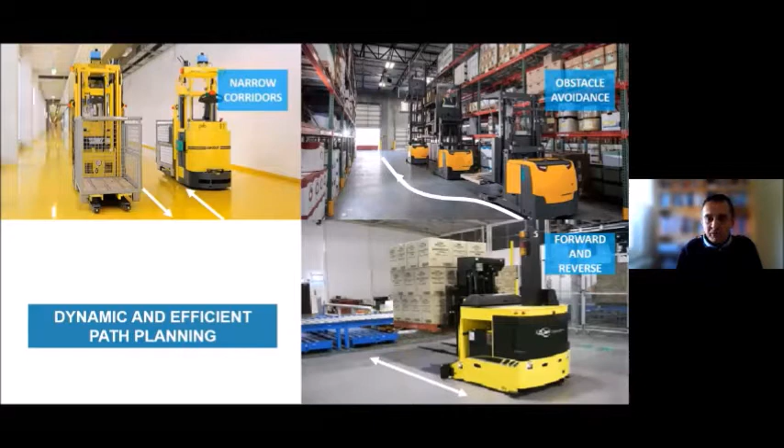In the first half of the webinar, we will address a very common need for autonomous vehicles, namely how to plan the motion. And this is typical for all autonomous vehicles because they have to drive to a destination, and the trajectory towards the destination has to be planned. But typically the environment is very dynamic, for sure in industrial environments, and these trajectories have to be adapted in real time to the conditions in the field.

And in the examples on the slide, you can see an AGV that has to pass another AGV in a narrow corridor. It has to avoid obstacles, and it has to drive forward and reverse.

So as I have already anticipated, we have two presentations. This topic will be covered in the next presentation, which is on optimal motion generation, which will be presented by Joris Gillis from Flanders Make, together with Jeroen Bridelance and Bram Vanseveren from Bekaert. And now I would like to give the word to my colleague Joris Gillis.

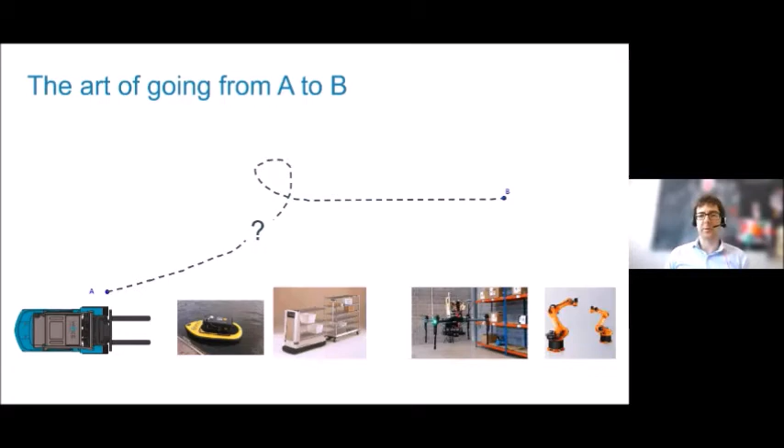So what kind of vehicles are we talking about? It could be forklifts or boats, or maybe a more complex model with a trailer. It could also be quadcopters, like 3D space. It could also be joint space of serial robots. So in general, some space of going from A to B, but let's now just visualize this screen as a top-down view of a warehouse with a forklift.

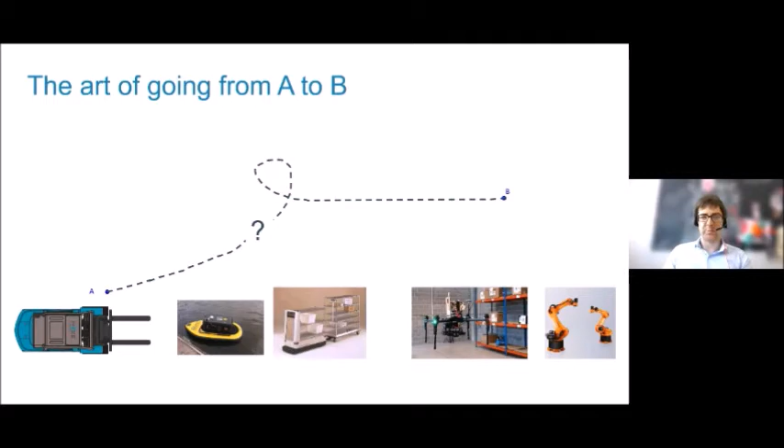So when you hit the obstacle, you could say, okay, I just go sideways for a couple of meters. And when I'm done going sideways, I go towards the goal point B again. And you could repeat this rule, and in the end, hopefully you end up at place B. So a very ad hoc rule-based way to go from A to B.

What are more structured ways? There are two big optimization-based approaches. And the first is discrete based. So you have this wide open region between A and B, and you just sample it randomly or uniformly. And all the valid locations that are not inside the obstacles, you can connect in a graph.

And then you basically apply the graph search algorithms that you find in your GPS or on Google Maps, and you just find the shortest path between A and B on the edges of this graph. So that's discrete based. Now the things I will discuss are continuous optimization based.

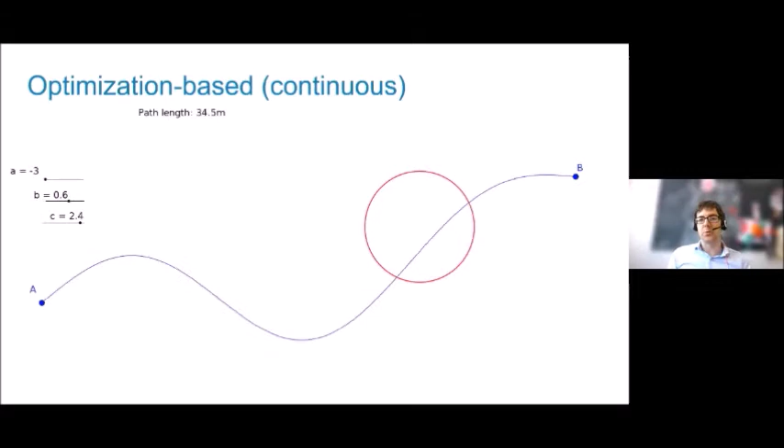So we can do this mathematically. We say our path length is really a function of A, B, and C. And then you could write, okay, let's minimize this path length. And the degrees of freedom are, as I said, A, B, and C. The only thing you have to take care of is the obstacle, so make sure that the distance between the path and the obstacle is positive.

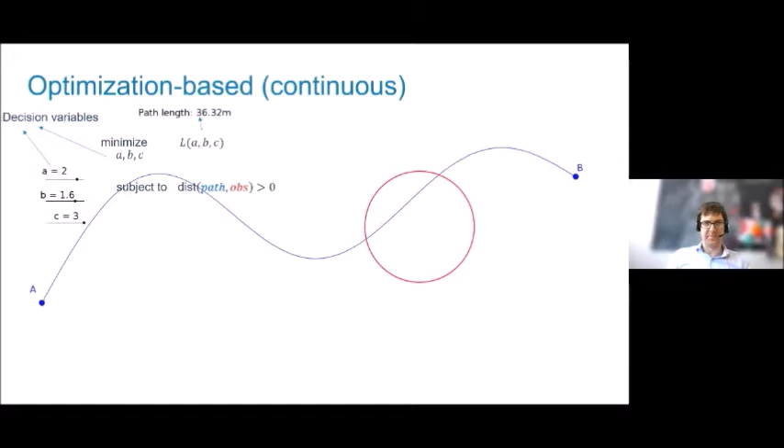And for a human, it's already quite difficult to do this with 3 sliders. But as we will see, for software, it's no problem. So we will use a technique called gradient-based optimization to solve this problem. And later on, I will go to software on a higher level. So what can gradient-based optimization do in this case? You give it an initial guess, which would be just a straight line from A to B. And then with just a couple of minor adjustments, you get to the exact optimal solution.

So this is the initial guess. This is the first iteration. So that's a numerical process thinking that the intermediate solution is this one. You do a second iteration, third, fourth, and with the fifth, you already get something very optimal. So it's almost straight for a while and then edges over to the obstacle. So this is quite nice that a numerical software can find this in only 5 steps.

And the power to do it is really in the ability to take derivatives or sensitivities of your objective, your goal, with respect to these parameters. In the packages at Flanders Make, we use a software called CasADi to do this. So this computes the derivatives that are needed for efficient solving. So in this case, the number of optimization variables was only 3, but it could also be 10 or 100 or 10,000. And typically the iteration number stays rather small. It doesn't grow unbounded.

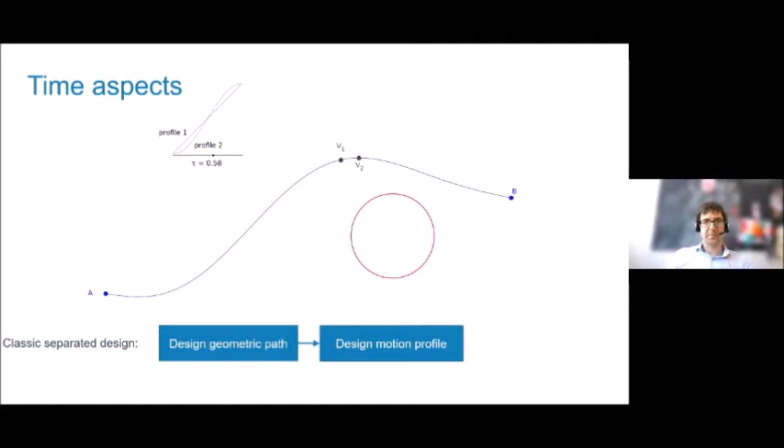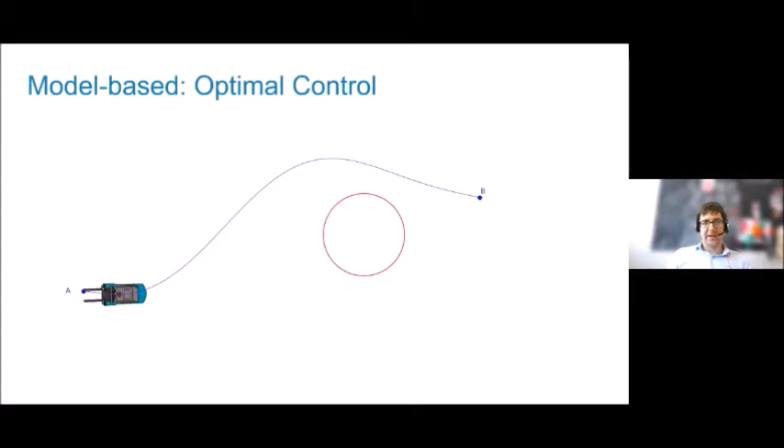Another aspect is that you can bring in the mechanics of the model of the vehicle you're using. I'll demonstrate this with another software tool that we built on top of the previous one.

In this case, we're going to set up an optimal control environment with a free running time. So we don't know in advance how long it will take to go from A to B. We keep it free and optimize for it, so we find the shortest time path.

Then we model the system with states and controls. Our forklift has 3 states: 2 for position, the X and Y position, and then also a heading. These are the states of our system. The controls, the degrees of freedom we can play with, are the speed of the vehicle and the steering angle.

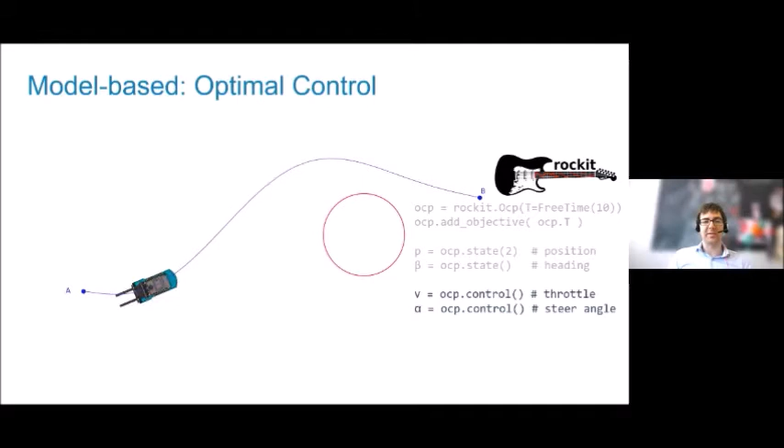If you do things right, when you solve the optimal control problem, it will find the steering trajectory and speed trajectory that you have to apply on the system. You can apply this in real time and it will follow this trajectory.

The model needs to be good enough, so we need some kind of prediction model. We typically do it with a differential equation. It could come out of MATLAB Simscape, for example. We can set as many boundary conditions as we want.

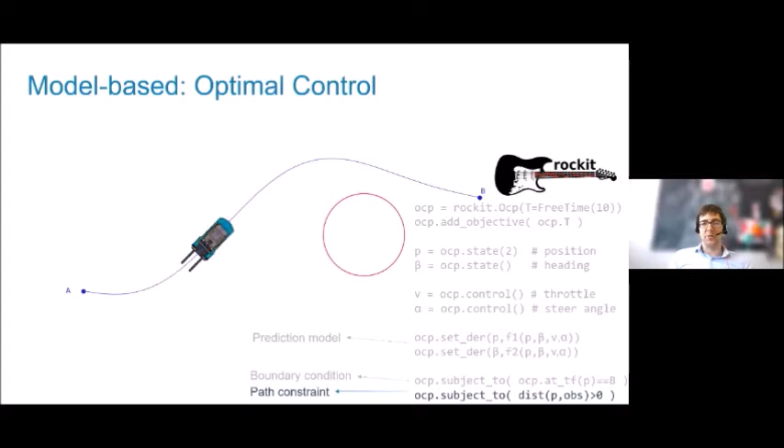In this case, we want to end up at B. There are also things that should hold during the whole trajectory, and that is, in this case, the obstacle constraint. This gives you a high-level way to specify optimal control problems, which are used to find optimal motion trajectories and the controls needed to implement those trajectories.

When I talk about optimization, historically not everybody has been doing this in the most efficient way. What you typically see when people are first using optimization is that they use unconstrained optimization and put everything into one objective. Let me demonstrate how this makes things difficult.

For our problem, we could say, okay, I want to minimize the time, so go as fast as possible. But there might be some path that we want to stay close to, so we don't use all the free space, we want to stay reasonably close to a prescribed path. You could do this by adding a term in the objective and giving it a weight, W1.

Then another engineer comes in and says, okay, we have to be careful with power, our battery is only limited, so we add power to the objective. And then there are the obstacles, and somebody invents a way to represent that you have to keep a distance from the obstacle, giving it another weight. In the end, you end up with a real tuning nightmare. You have all these different weights, and depending on your system and context, you will have to retune and retune these weights. It's not a nice situation to be in.

What you should really do is exploit the fact that you can have constraints in the optimization problem. So instead of promoting staying close to the reference, just say how close you want to stay: I want to stay within 1 meter, or 1 centimeter, or 1 millimeter, and let the solver figure out the rest. For the battery, maybe you say the battery has to stay alive during one shift of your factory workers, and it doesn't matter if there's more or less battery power left after that shift. Also, you just have to make sure you're a safe distance away from the obstacles.

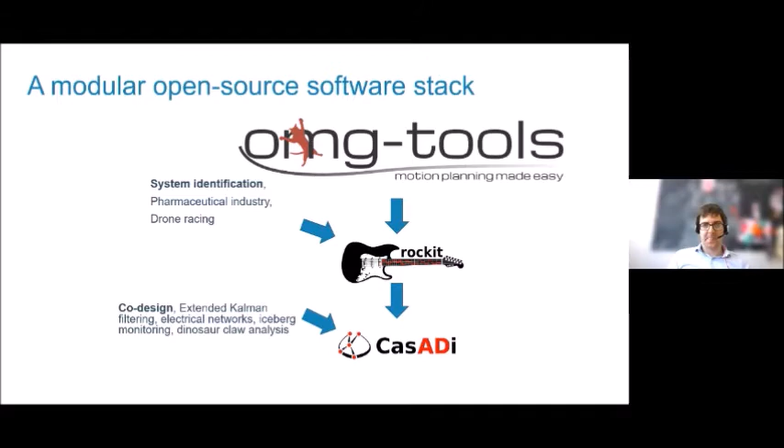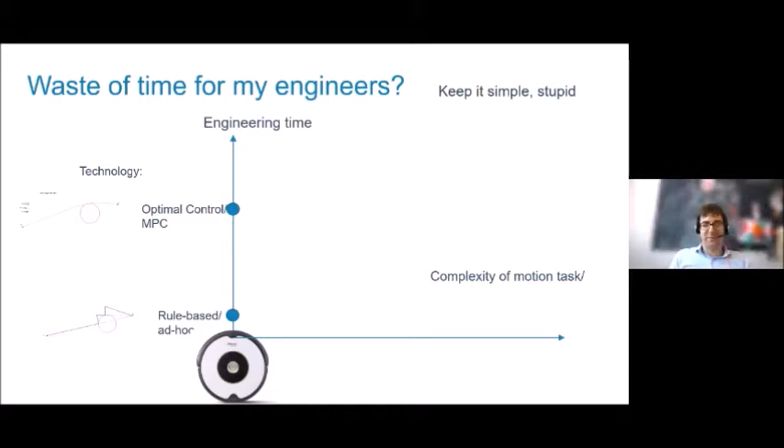So why am I telling you all of this? Perhaps you are thinking at this point it might be a waste of time for my engineers. Let's see. Things that are developed ad hoc or rule-based typically don't need a lot of engineering time. So if I plotted this technology on the scale, you don't need a lot of time. If you go for optimal control or MPC with OMG tools or other tools, it will require a large investment in time from your engineers. But the thing is, this is only true when your systems or your tasks are very simple. So if you're a company designing cleaning robots, maybe all of this is overkill, and a random walk in the environment would be enough.

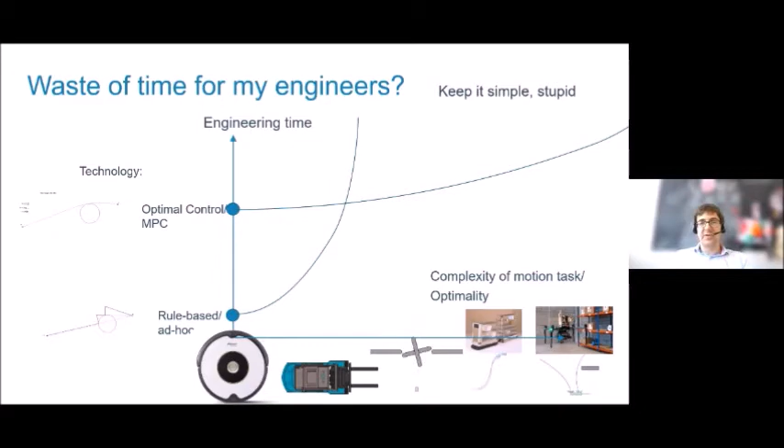The thing changes when you have an increase of complexity. Like a forklift is a bit more complex, or you might have things that evolve over time and you can use preview, or you can have a system with a trailer, or drones or robots. So on this bottom axis, you get more and more complexity, or more desire to have more optimality. And optimality would translate into throughput or economic advantage. So my argument is that if you stick with rule-based or ad hoc techniques, you would quickly go up and maybe hit a brick wall, while with optimal control, optimal motion generation, you start high but you stay low.

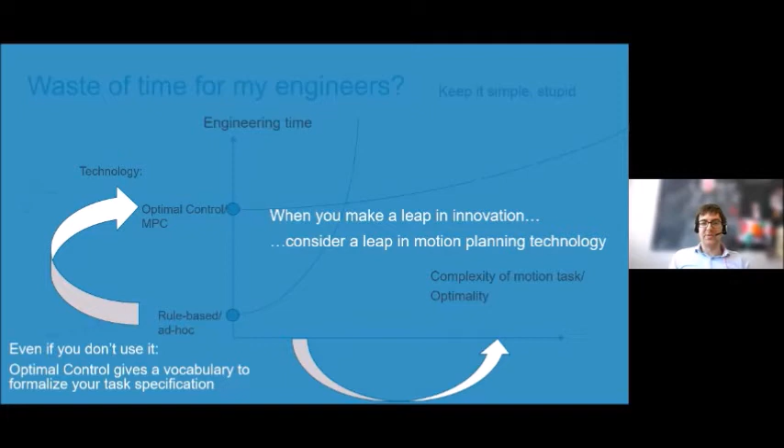The conclusion would be, if you plan to make a leap in innovation of your products, going from simple products or simple contexts to more complex ones, then perhaps you should also reconsider the technology you're currently using for making motion planning. Even if you don't want to bother your engineers with it, you can already use optimal control's vocabulary to formalize what a good motion task is, and it makes it very easy to communicate with engineers in other fields.

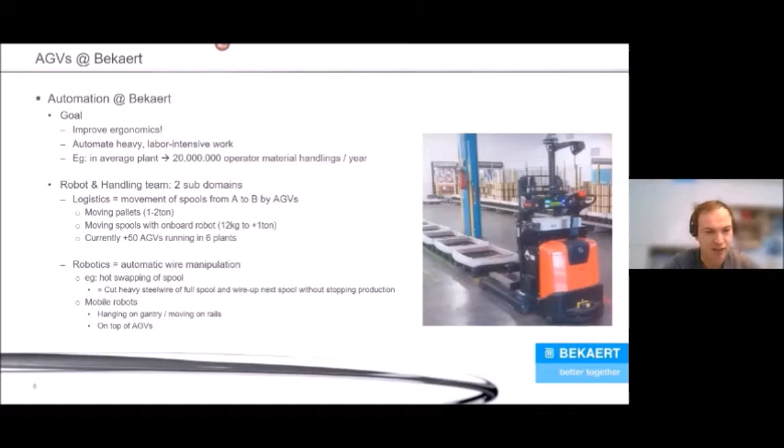For that, we started using mobile robots. First, we went for robots hanging on a gantry or moving on rails. But later on, because we have a lot of machines and a complex environment within the Bekaert plants, we started to build those mobile robots on top of AGVs. Because of this, we have a lot of AGVs, and this requires good navigation for them.

Looking at the navigation technology we use, this is the only part of the AGVs that we do not develop at this moment for Bekaert. We used off-the-shelf products, that being the NDC8 platform of Kollmorgen. It has some pros: it is highly reliable and well known to the industry.

But there are also negative points, being that AGVs need to drive on fixed segments, so you cannot move away from them. This means we can do no obstacle avoidance or collision avoidance when we started the project, and also no map refinement is possible. What I mean by that is if we know a spool is always 5 centimeters more to the left, there is no possibility to teach the system that with this setup.

Now I will give the word to my colleague who will talk about those two negative points about the system.

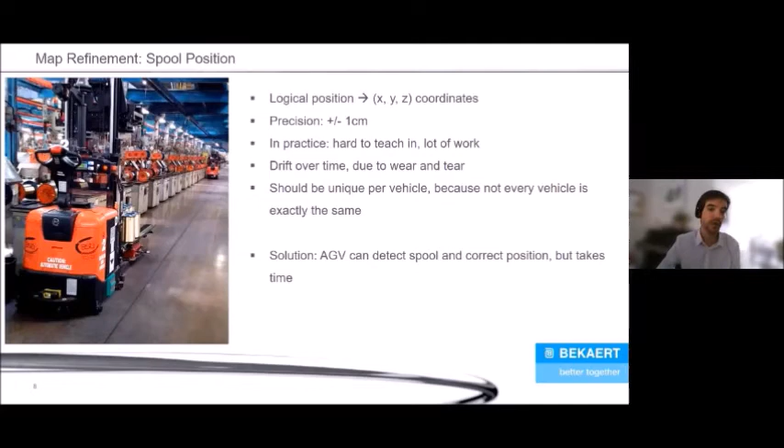The vehicle drives there, and the vehicle detects the spool at slightly different coordinates. Let's call them x2, y2, and z2. The vehicle, of course, picks the spool. Then a very important step, step 4: the vehicle sends back the offset. So it says I did a correction in x direction of 50 millimeters, in y direction of -5 millimeters, and in z direction I did a correction of 0 millimeters, for example.

This information is sent back to the host system, and in the host system we keep it in a database. So for every logical position, we keep the physical position per vehicle. If the vehicle sends back these offsets, we update that position.

What we do, we first detect outliers. If the vehicle sends a value back to us that is really, really different from all the previous values, it's probably a sensor glitch or an error in the vehicle software somewhere. So we discard these values. And then if we accept the value, if the value is okay, then we take a sliding window average from the last values. For example, the last 3 offsets that that vehicle sent back for that specific location, we take these averages and we update the position.

So next time the vehicle drives there, we will send these updated values to the vehicle. So the vehicle will, in normal circumstances, already be positioned correctly with these updated coordinates and will be able to pick the spool perfectly.

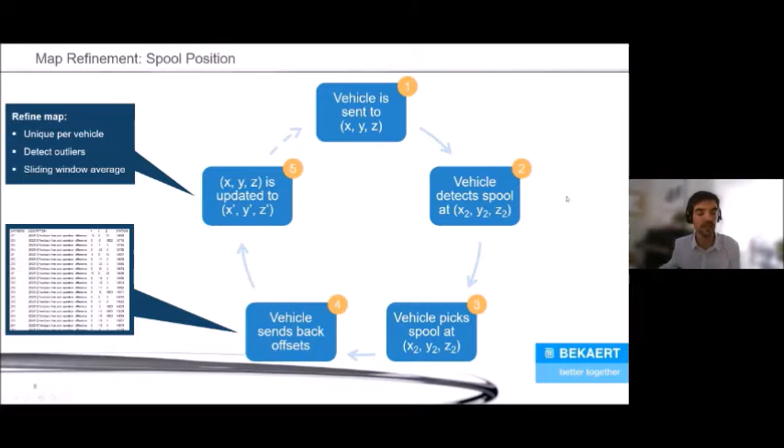So if a vehicle arrives, it has to pick a driving lane, the top one or the bottom one, and can only pick on that side. The vehicles also always drive in one direction, in this case from the left to the right. That's just for safety, because an operator then always knows where a vehicle can come from. And with these types of vehicles, they pick a lot of spools in one bay, up to 15 spools, and then they drive to a palletizing robot for unloading.

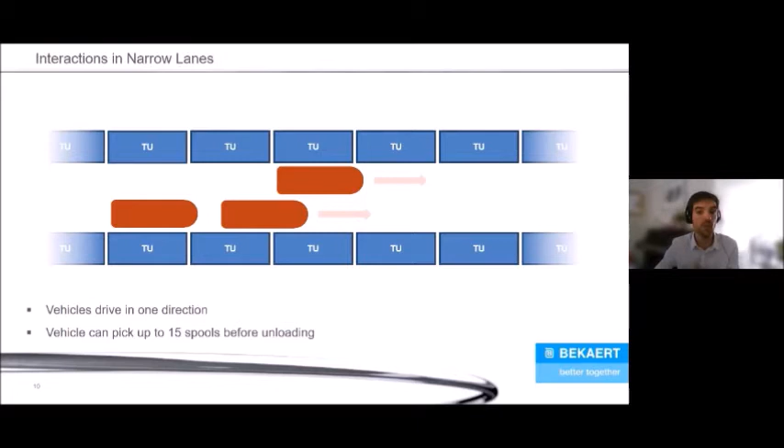The problem is, of course, that on the bottom, these 2 vehicles drive behind each other. If the first vehicle is slightly slower than the second one, it will be blocked a lot of the time because it cannot pass or overtake. Also, if an operator is working in that bay, the vehicle will also be stopped.

If you look at it realistically, we see that it is not efficient. Our vehicles, our current generation of vehicles, are quite long. The driving is very inflexible. So we decided with this type of vehicles not to drive around obstacles. It's a huge loss of time. For our next generation of vehicles, we're looking into way smaller vehicles that are more flexible, that have more steering wheels, because our current generation only has one steering wheel. When we have that new generation in place, then we will, of course, look into driving around obstacles again.

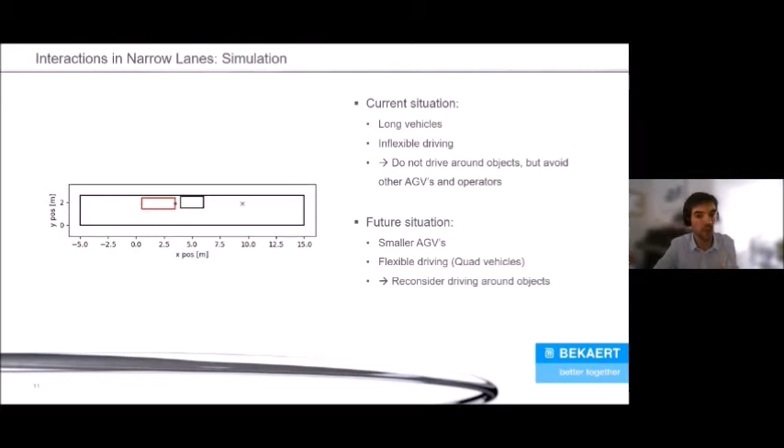So we could not solve our problem with this solution, it was clear. So we decided to go for a different route. We have a planning algorithm that decides which AGV will pick which spools. We decided to write a completely new planning algorithm from scratch with some extra requirements. The first requirement was that we wanted to make it very efficient. So an AGV would only drive through a bay and pick spools there when it could pick a lot of spools. A vehicle can pick up to 15 spools. So let's say we only let it drive to a bay when it can at least pick 12 spools. Or, of course, when it is urgent.

Every spool needs to be picked before a certain deadline, and that deadline is when the next spool in that machine is ready. So a spool is laying on the table. When the next spool is ready, the previous one, of course, cannot be on that table anymore. So a vehicle will only drive through a bay when it can pick a lot of spools, or when it becomes urgent. We call that just-in-time picking. And a second requirement is a vehicle should avoid bays where other vehicles are already present, because that would lead to annoying interactions. So we developed an algorithm with a scoring system.

So the algorithm has five parameters that influence the score, and each of these parameters has a certain weight. That defines how big that influence on the total score is. So if an AGV has nothing to do, he will calculate the score for every bay, and then he will decide what bay to drive to. If the score is too low, he will not drive to any bay. If the score is high enough, he will drive to the bay with the highest score.

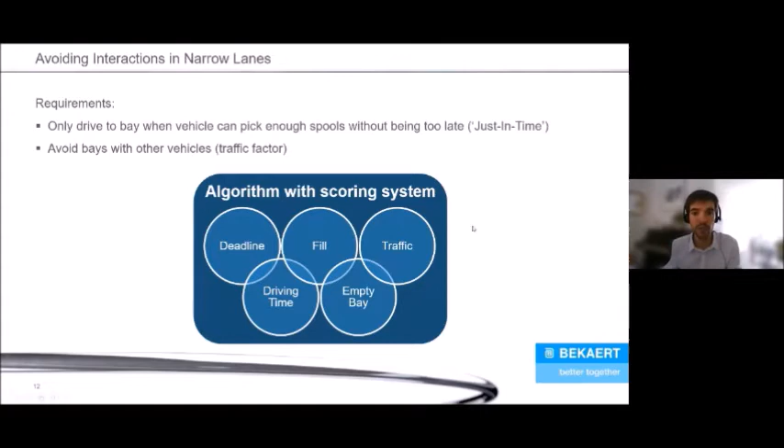We implemented this system. So in 2016, we had the old algorithm. In 2019, the new one with the scoring system. If you look at the block time, so the time an AGV is not able to do useful things when he is standing still for another AGV or an operator, it used to be more than 7%, and it dropped to less than 3%. That does not seem that extreme, but if you look at the number of spools, we pick 1,000 spools more. In 2016, we picked 2,600 spools, and now we pick 3,600. So a drop in blocking time and picking way more spools proves that the algorithm works and the results are quite good.

So interactions with other AGVs, that is solved. The only one that remains is interactions with operators. We had a very simple system for that. We installed at the beginning of the bay a push button and a colored light. If that light is green, it means an AGV can go and pick in that bay, and that no operator is doing a lot of work there.

If an operator needs to do maintenance to a machine or needs to weld something, then he pushes the button, the light becomes red, and that's an indication for the AGV that he cannot go in that bay and pick spools. When the operator is finished, he pushes the button again, the light becomes green again, and the AGV can take that bay again into account.

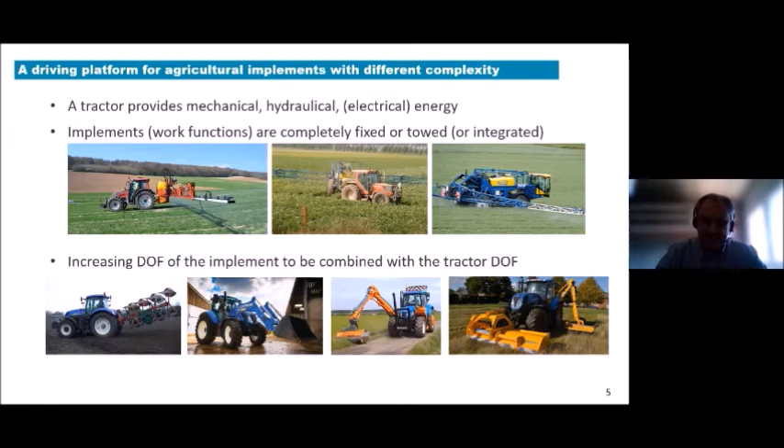For a mowing arm, you can lift it, but you can also stretch it further away from your vehicle, and you can tilt your mower, which are already 3 degrees of freedom. And if you're adding work functions and implements on the back side, but also on the front side of your tractor, you still have more degrees of freedom. So all of this functionality we want to be able to control.

And if we come back to the main building blocks, a first block there is the sensing. And you have sensing with different objectives. First, you have the sensing for your work function. In this case, we want to work with a front loader, which means we want to see the object we want to manipulate. In this case, this is implemented by 3 LiDAR sensors to detect a pallet.

So this LiDAR sensor works on an emitted laser pulse, which is reflected, and we can measure by that what is the distance. So we obtain a point cloud with distance and intensity towards objects in the neighborhood, including the pallet. And then in the processing that we do with those data, we have clustering of points, and we can detect the opening in the pallet that we need. This is still an expensive sensor, but as higher volumes of this type of sensor are coming in the automotive world, the price for this is rapidly decreasing.

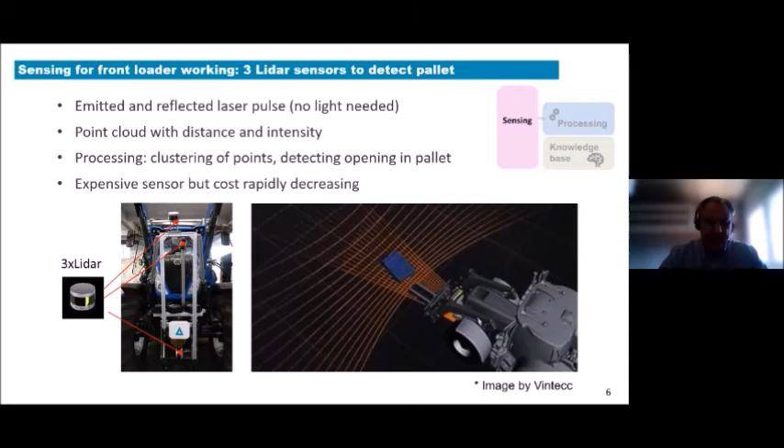A second sensing functionality we want to have is to detect obstacles. In this case, we have a radar and a camera combination that we use, for instance, to detect two persons walking beside the tractor in a field. The radar can give us the position and the velocity of those objects. The camera we use for classification, for instance, to say, oh, what you see there is a person.

And then for processing, in this case, we need quite high computational power by an NVIDIA Drive PX2, which is also typically technology used for autonomous driving. And we use that to recognize that the objects are persons. In this case, the knowledge base is a trained neural network. So it has been trained, for instance, for persons, which means that for mobile working, if we want to recognize other objects, for instance, the crop or stones or holes that could damage our implement, we will have to capture new data and we will have to retrain neural networks.

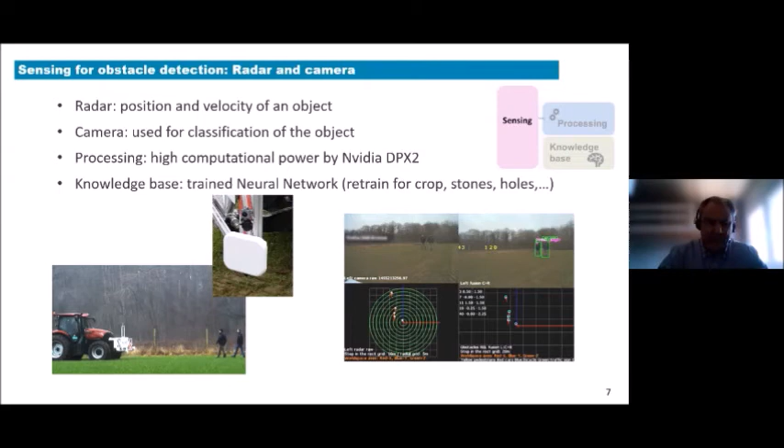And then the third functionality for sensing is to know where we are. And that we have realized on our tractor by implementing a standard GPS RTK system, which is basically using information from all global navigation satellites and using also fixed references. That gives us 2 centimeter accurate position of our tractor. And the knowledge base that we can use here is a map of the field, which we eventually have built up in a CAD system, or that we have been building up by historical information from driving over the field.

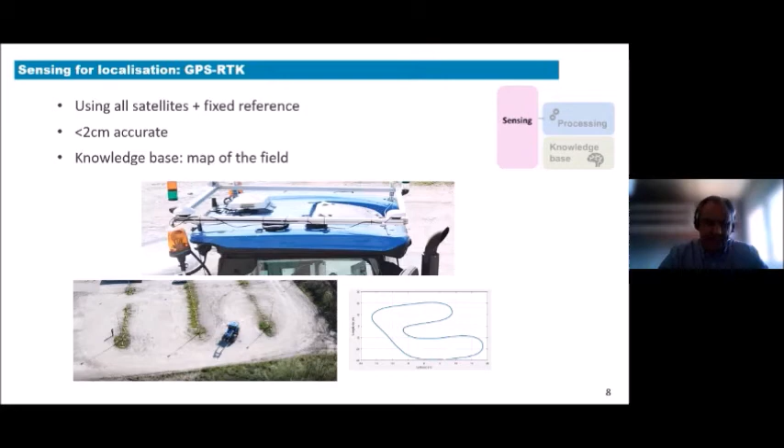Now that we have all the sensor information and by the initial processing have already turned that into valuable information, we can go to the next steps within the processing. On one side, that's high-level planning. For instance, first decide to go to a certain GPS position, which is bringing us a motion along a defined path with its own longitudinal and lateral control.

And then once we are close to the object we want to manipulate, go to a work motion planner, where we have both the motions of the tractor that we have to control, for instance, first aligning well versus the pallet, and then next operation where we, for instance, move the front loader and lift off the pallet.

During that task execution, we still have to keep in mind that if we see an object which is in the way, we either have to stop for the object or restart the planning and replan the whole path and follow a way around the obstacle.

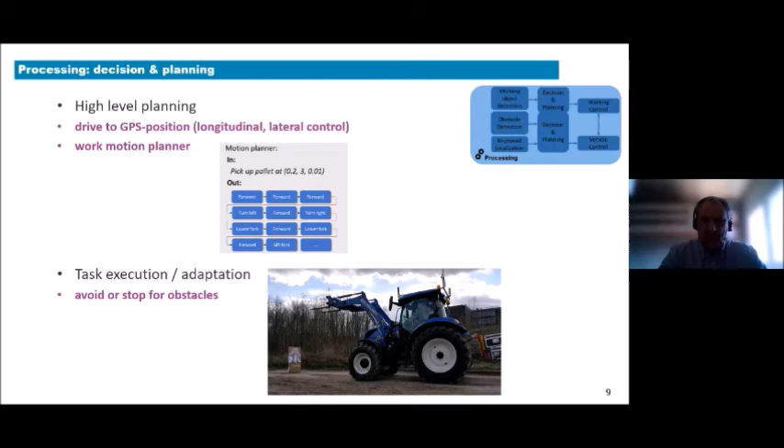Once we know how to control, we of course need to bring those signals to the actuators which are on the tractor. We have 2 different ways to do that. One is by sending the proper commands over the vehicle CAN network. On one side, for the working control, that's the lifting of the front loader, but also, for instance, starting the PTO so that we actually can bring mechanical energy into our work function.

But also sending the necessary commands for the vehicle control. That means the commands for the steering, for the throttle, for the gearing up or down. If we cannot do it over the vehicle CAN network, we also have a system which can be built upon the steering wheel, upon the available pedals, so that by mechanical activation of those operator interfaces, we can also bring commands to vehicles who do not have the type of electrical control.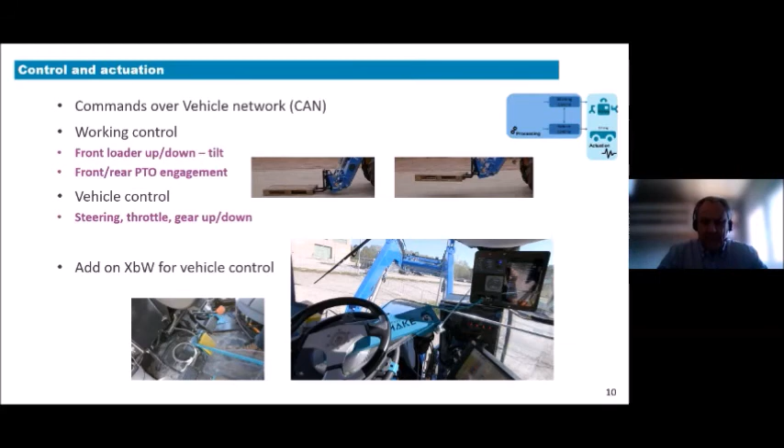And then the current situation is that purely for safety reasons, we do not want to have an unmanned cab. So we always have an operator in the cab who, instead of still operating the vehicle, is just monitoring how the different processes are running.

We have on board quite large data storage. As I explained, you at certain moments need a lot of data to be captured to be able to train some of the artificial intelligence systems on the information that are typically available in the working environment. We have a point-to-point communication for remote monitoring and control by other persons outside of the tractor cab.

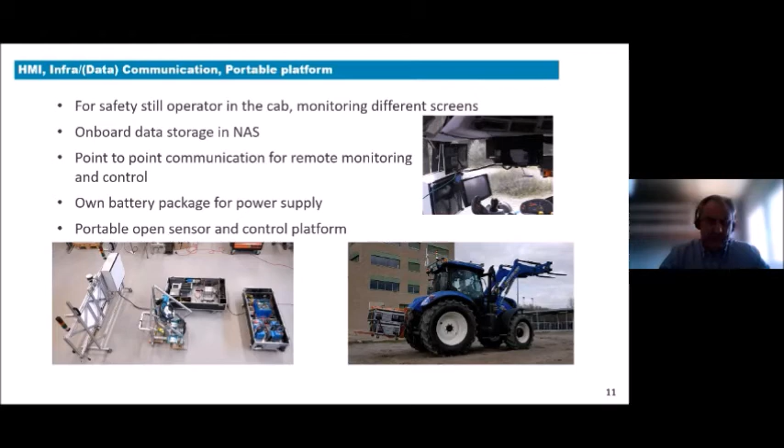We have an own battery system, which can provide the whole control system with power. And everything has been materialized in boxes and into portable systems so that we can put it on various vehicles. So this is an overall architecture. We have the sensing units, we have the perception pre-processing computer units.

And then we have on one side a rapid prototyping software for rapid manipulation of additional perception information. And we have a rapid control system, which allows control system engineers to very rapidly make controllers, for instance, in Simulink, and then make that into an operational program that we can download to the tractor. And there we also have a lot of interfaces, communication, I/O protocols that we on one side can use to add additional sensors, but also can use to control drives and other actuators on different vehicles.

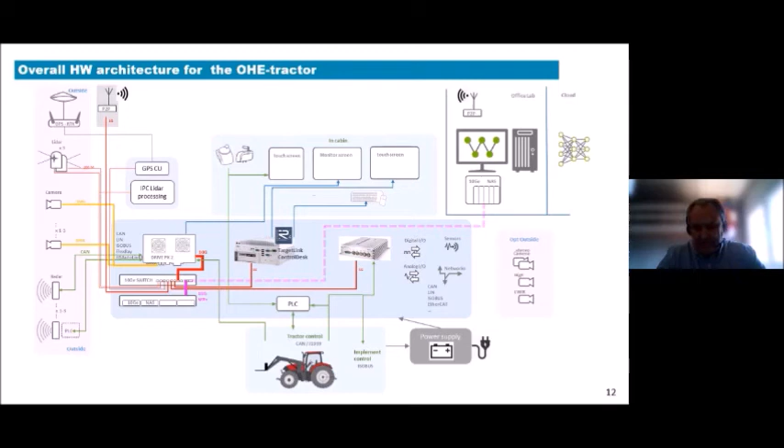With this realized mobile working platform and tractor, we want to support Flemish companies working on autonomous mobile vehicles, not only in the field of agriculture, but also on logistics, but as well construction works, mining and forestry. The front loader operation is typical for logistical and agriculture operations. We also want to further develop the use of artificial intelligence, for instance, better understanding what's happening around the vehicle, faster learning with less data, and also learning to execute more complex tasks in a very natural way.

And as we have the working and driving to work together, from an architectural point of view, it's not always clear yet how these have to work together. So the question is, how can you best build up your total system in a modular way on the levels of sensing and perception, on the levels of motion control, but also at the level of safety.

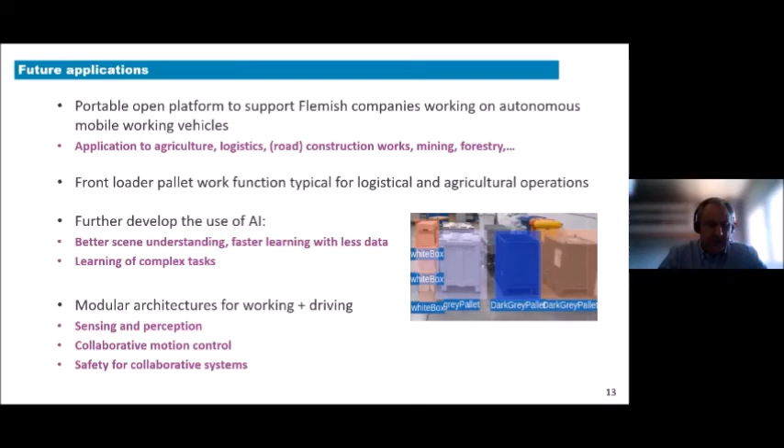And I now want to give the word to Bart Lenaerts from CNH, who can give you a view from the industrial side.

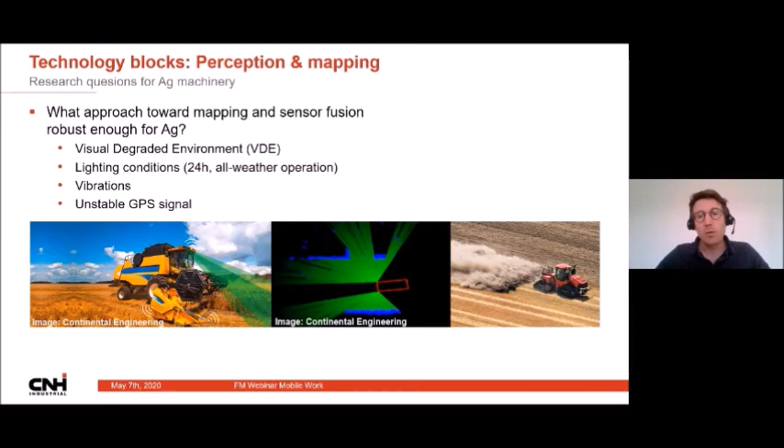Which are sometimes challenging for certain sensors, and we sometimes have an unstable GPS signal. Still, we want to be able to create a clear point cloud and a clear map that we can use for navigation. So therefore, we envision a sensor fusion of sensors of different principles to a map that then can be used for robust navigation.

Secondly, we have a question towards functional safety. How can we make our system certifiably safe if we take it to production after this project? Two main questions there are: how can we set up an appropriate engineering framework, or adapt our existing engineering framework, for designing future functional safety and operational integrity for autonomous vehicles? And what are the implications of the functional safety standards on our electronic architecture and component selection?

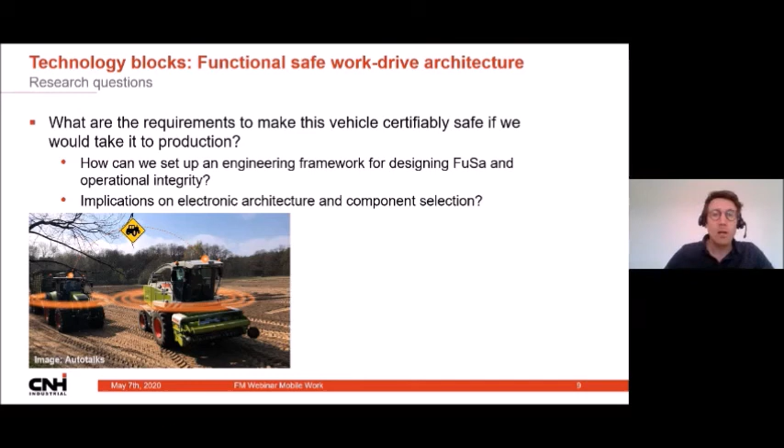Then a last technology block is on the simulation of agricultural vehicles and their environment. As you know, in the automotive space, Waymo, Tesla, and so on are driving millions of miles in a virtual environment and training their neural networks and controllers that way. But these tool sets are not easily adaptable for an agricultural environment. The question now is how can we select and adapt this tool set so it can be useful for our case. There are three core uses for these kinds of simulation tool sets.

The first one is the development of perception and obstacle detection. There are not so many sensing models for crop existing today. So how is the interaction of waves of sensors, for instance microwaves, laser light waves and infrared waves? How are they with the complex geometries of crop and complex properties, for instance in the microwave domain? How can we make a photorealistic rendering of this environment for neural network training for camera data? That's certainly not easy in the case of crop.

Then a second goal of these toolsets is accelerated development and testing of controllers. We have to make sure that this toolset can interface with our existing vehicle dynamics models and with soil and crop engagement models like the one you see below. It's a discrete element model for a tillage operation.

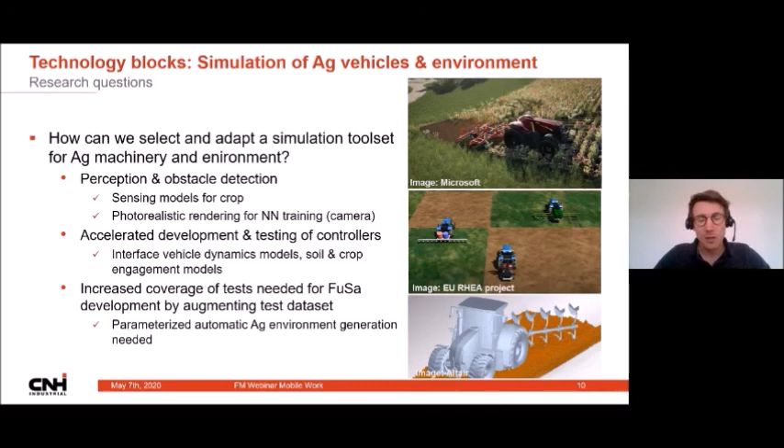What will the future bring for agricultural machinery? You will see a clear diversification and also an integration of machinery. We see a gradual transfer of tasks from the operator to a highly automated system. But for quite a while still, we will see machines of different levels of automation or autonomy in the same field.

So that's it from my side. Thanks a lot for your attention.